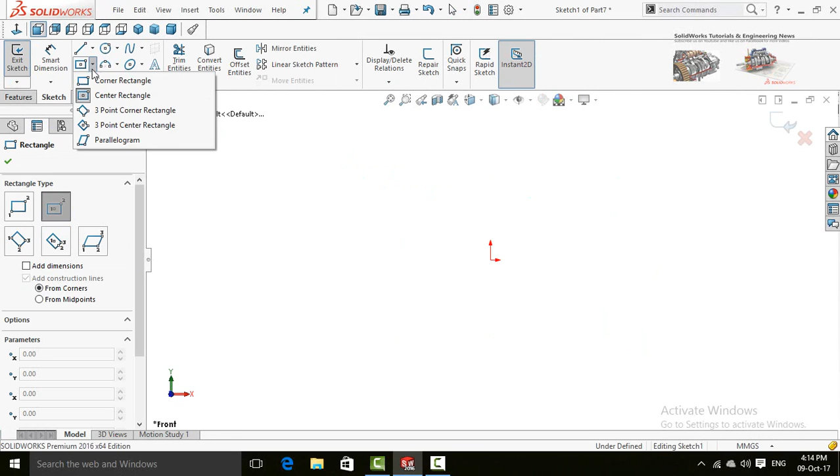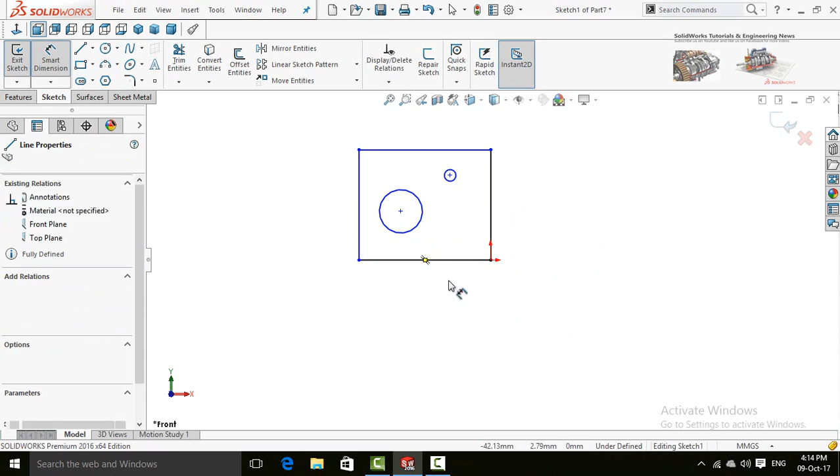Sketch on front plane. Now select rectangle, corner rectangle, and start it from origin. Now draw a circle. Define them. 28" and 30".

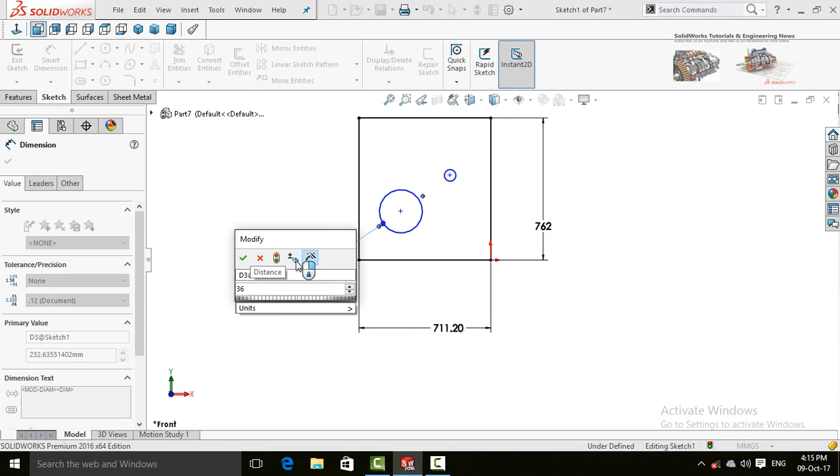Now define circles: 360 and 55 millimeters. Press escape button and select points and place them on the quadrants of circles.

Now define distance from top line to this point is 115 millimeters, and the distance from this line to the point is 150 millimeters.

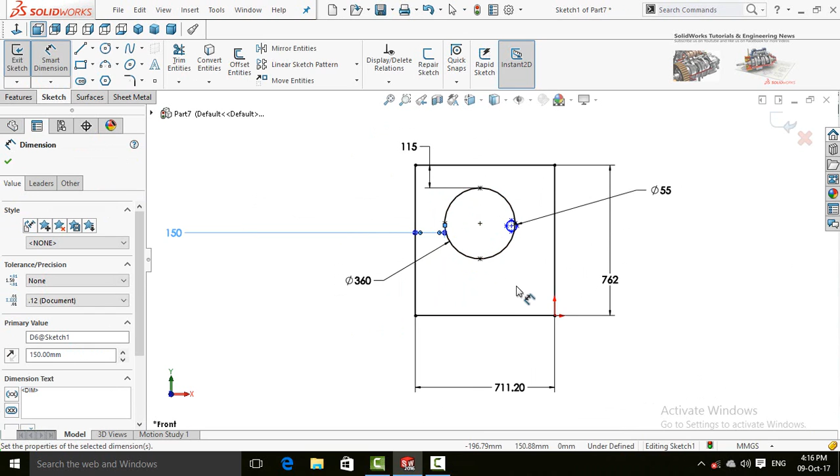Now distance from this point for this circle to the top line is 180 millimeters. Similarly, this distance is 105 millimeters. So our sketch is fully defined.

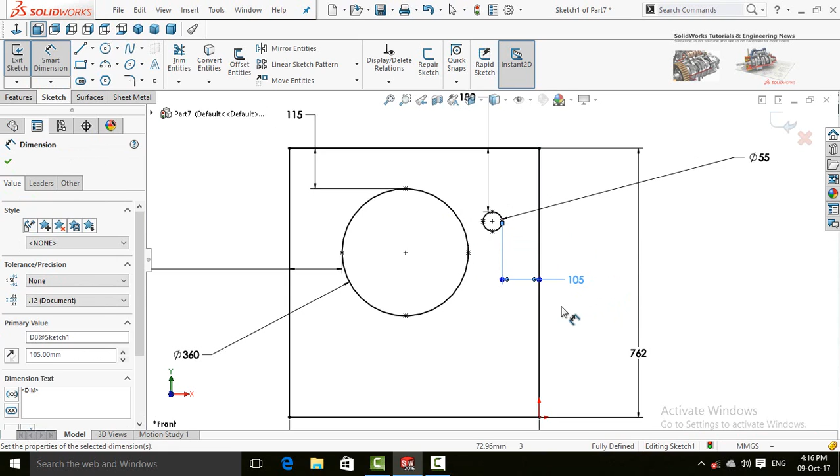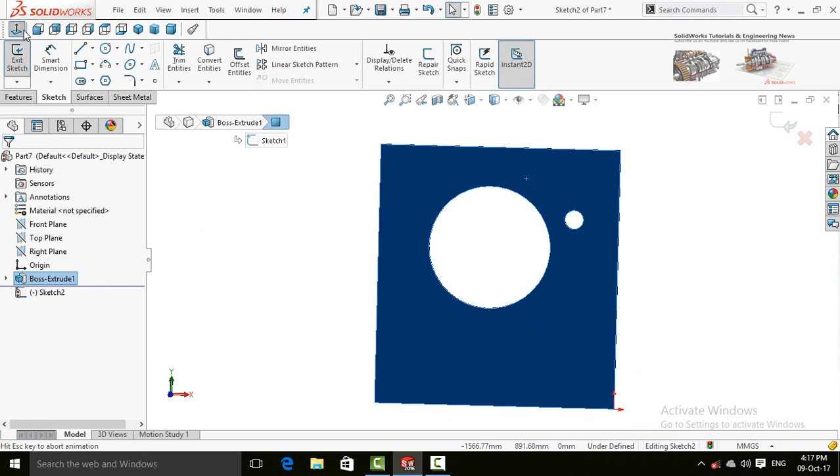For extrusion, go to Features tab and select Extruded Boss Base command. Extrude it up to 1/2 inch. Press OK button. Now we need to add holes in it. So for that, sketch on this face and then normal to.

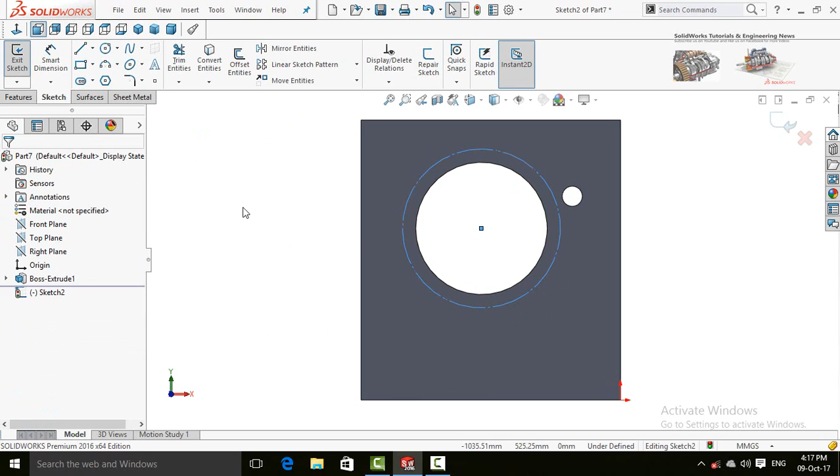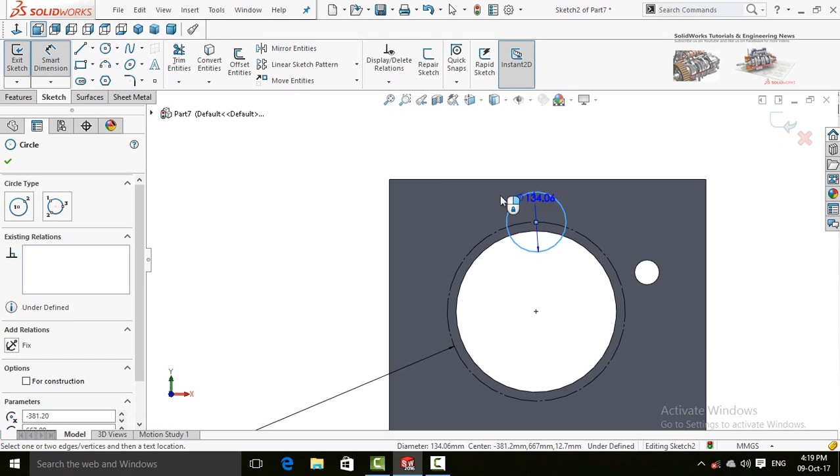Draw a circle from the origin of existing hole, and then in the left side select for construction geometry, press OK button. Now draw another circle. Now define them. This would be the PCD, which is 400 millimeters. Now define this drill size, 12 millimeters.

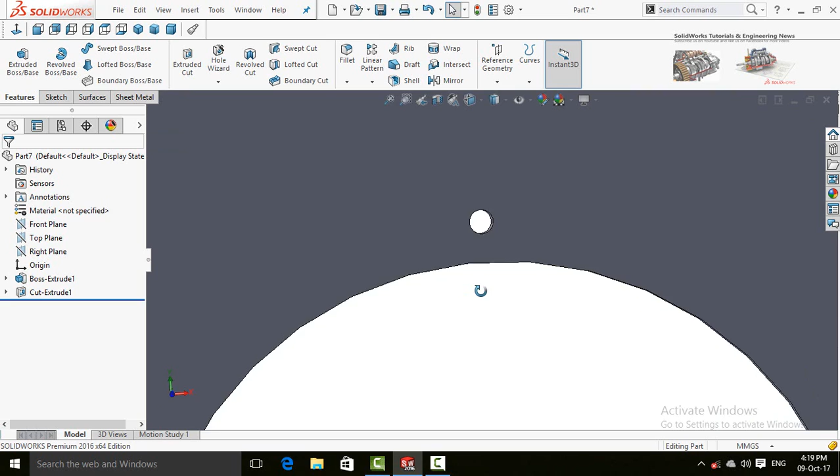Now click on Features tab and then select Extruded Cut command. Drag this arrow and press OK button. Now click on Linear Pattern button and then select Circular Pattern. Select this hole as Features to Pattern and then click on this box Pattern Axis. Now select this circular edge.

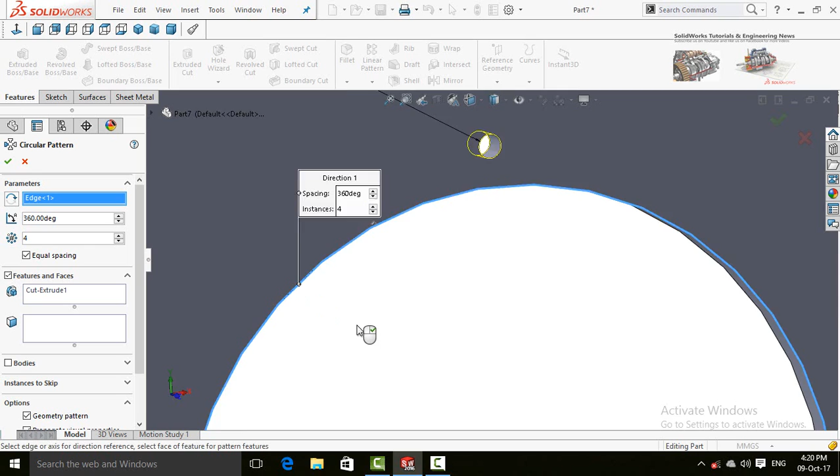Now define the quantity, which is 12. Press OK button. So this part is ready for manufacturing.